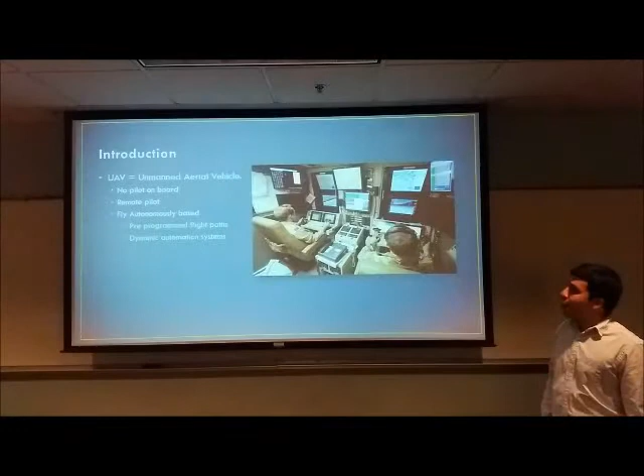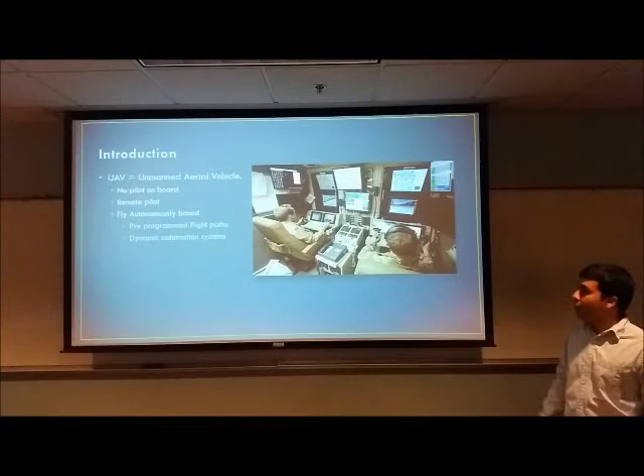What is a UAV? The UAV is an unmanned aerial vehicle. That means there is no pilot on board, and it is flown by a pre-programmed flight path or dynamic systems.

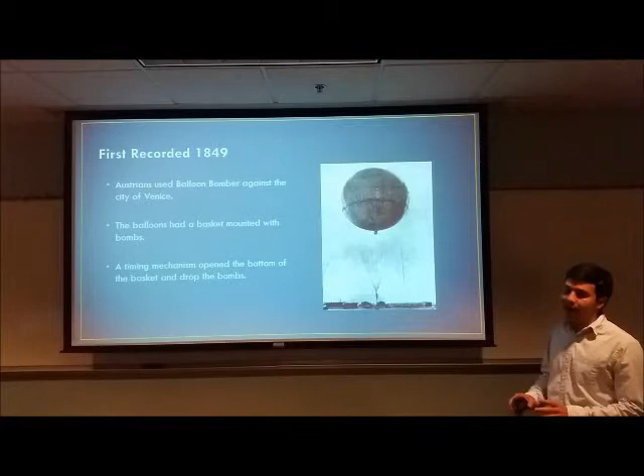Now, a little history on the origins of the UAVs. The first recorded use was in 1849 by the Austrians, who took a balloon with a basket and put bombs inside, with a time mechanism that opened the bottom of the basket and dropped the bombs into the city.

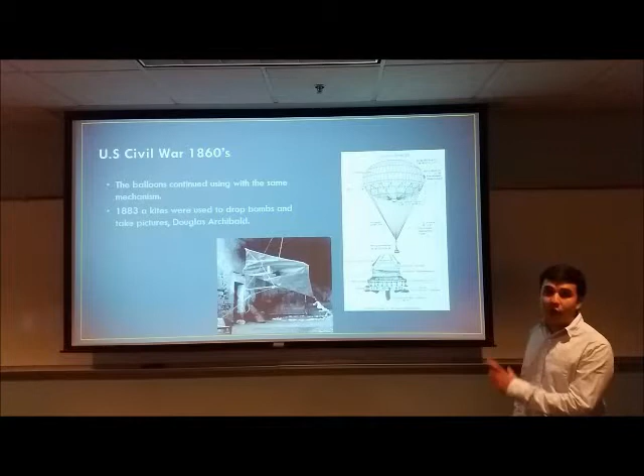Those balloons were used as well in the US Civil War in 1860, and in 1883 Douglas Archibald used a kite and a camera to take pictures from the air. An American soldier watched that and rapidly adopted it for the army, putting bombs on it to drop on the enemies.

During World War I, Rene Lorin created the gyroscope and barometric stabilization. In 1918, Charles Kettering was ordered to create an aerial torpedo, known as the Kettering Bug. When flying under automatic control, it would drop the engine and wings, and the torpedo would automatically go to the enemies.

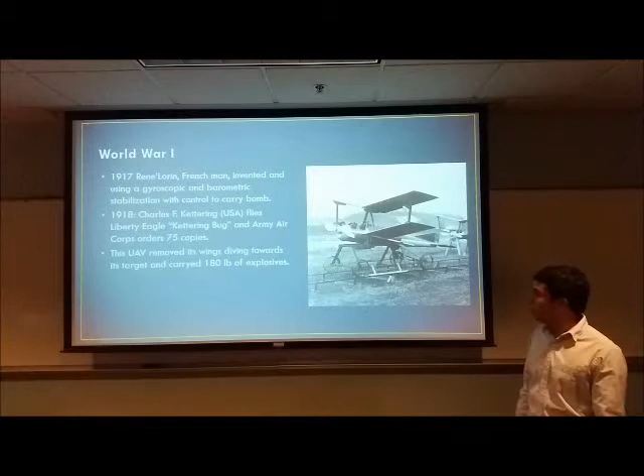In World War II, in 1942, the Interstate BQ-4 was developed by the US. It flew with only two piston engines, was remotely controlled, and could carry 2,000 pounds of bombs.

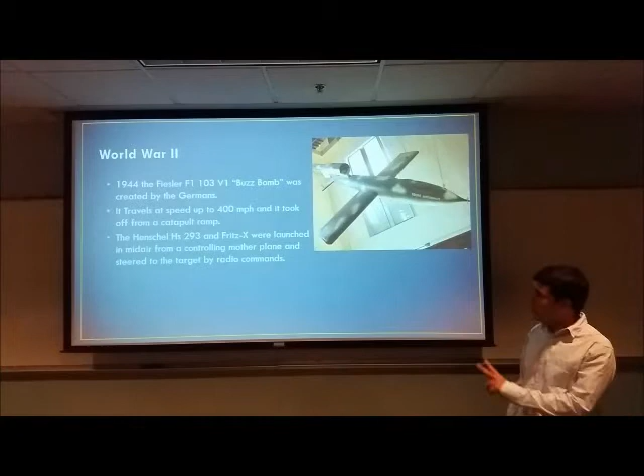Also in 1944, the Germans invented the Fieseler Fi 103, which had a top speed of 400 miles per hour. Another two models were created by the Germans as well, launched in midair from controlling mother planes.

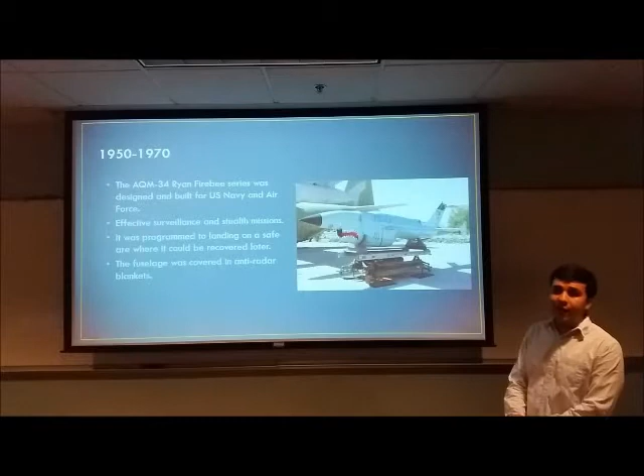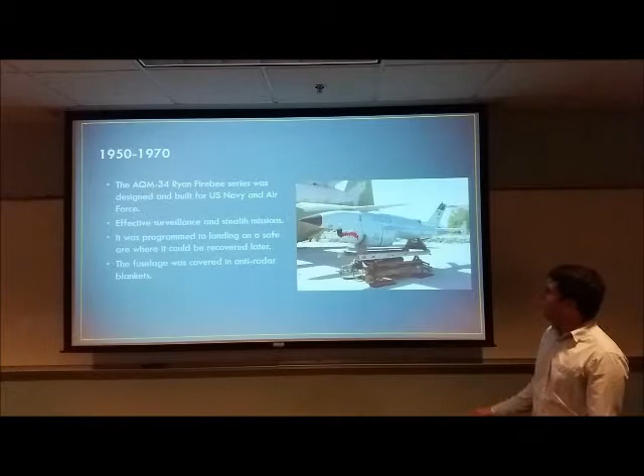Between 1950 and 1970, a lot of new UAVs emerged. One of these was the AQM-34 Ryan Firebee series, which was really effective for surveillance and stealth missions. It was covered with anti-radar blankets and paint to avoid detection.

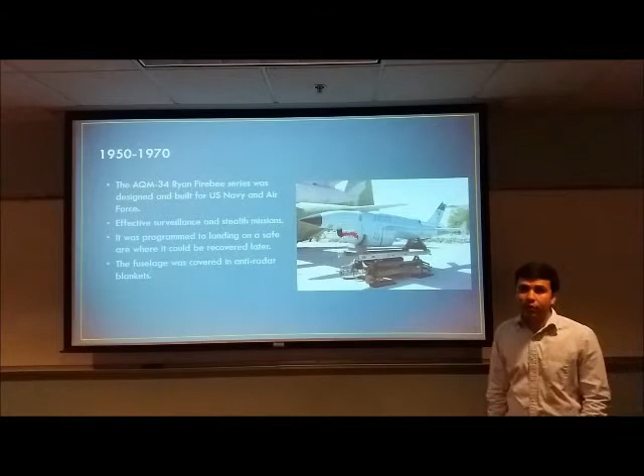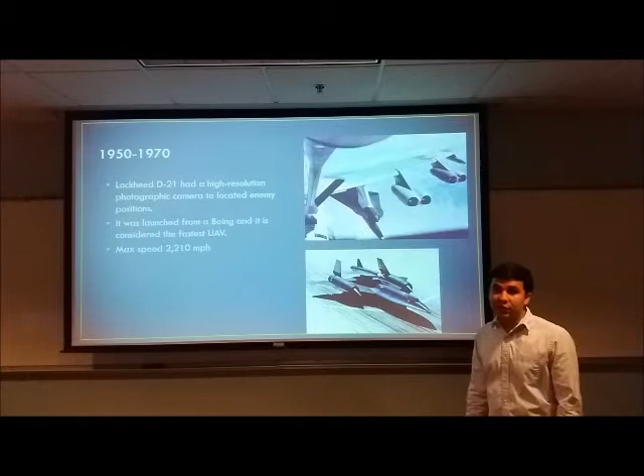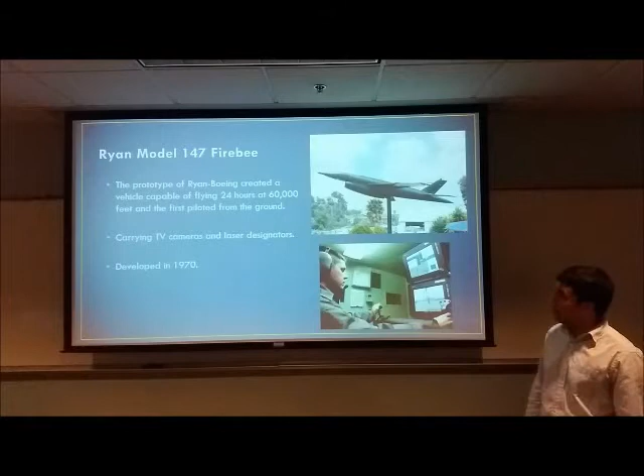Another foreign model was the Ryan 147, the first UAV piloted from the ground, from a cabin, as shown in this picture. It carried TV cameras and a laser designator, and was developed in the 1970s.

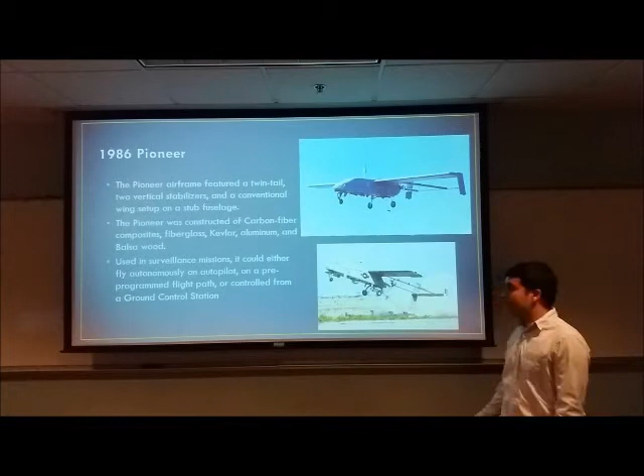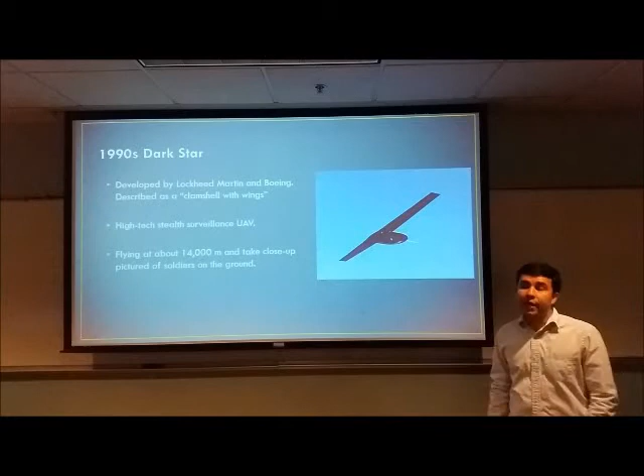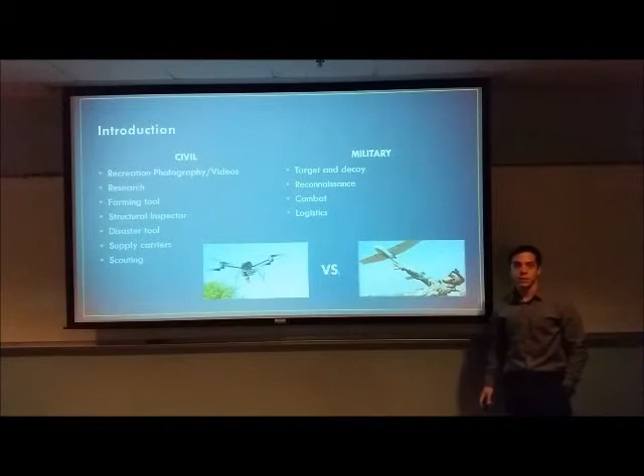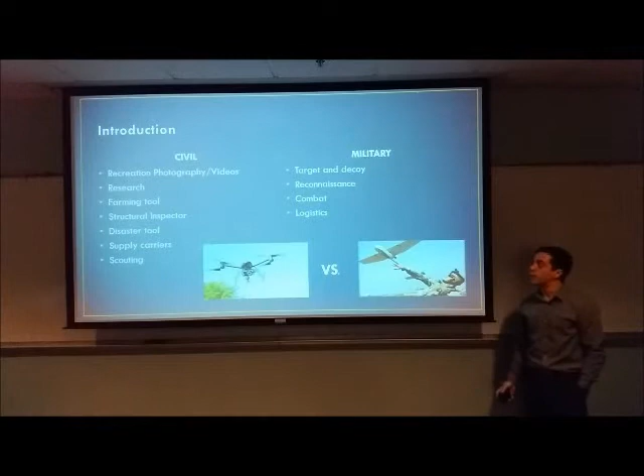Hi, my name is Nicholas, and I will talk about the present of the UAVs. Since there was an increase in technology, nanochips, and microcontrollers, UAVs are not only used for military purposes but also for civil applications, including recreational photography, video, research as a farming tool, structural inspection, disaster response, supply carrying, and scouting. Militaries now classify UAVs into four categories: target and decoy, reconnaissance, combat, and logistics.

Researchers have used UAVs like this one incorporated with sensors such as biological, gamma ray, infrared, ultraviolet, temperature, pressure, and wind speed sensors. With these sensors, they can go into the field and take measurements without putting themselves in danger. For example, gamma rays can be dangerous to humans, but if you send a UAV, you can get the same measurements without risking your life.

Also, NOAA, the National Oceanic and Atmospheric Administration, uses UAVs to track wildlife migrations, or to go into the field and check on vegetation without having to travel hundreds and hundreds of miles.

Farmers also use UAVs to survey crops and livestock without actually having to go out. They can just send out a UAV and see how their crops are growing.

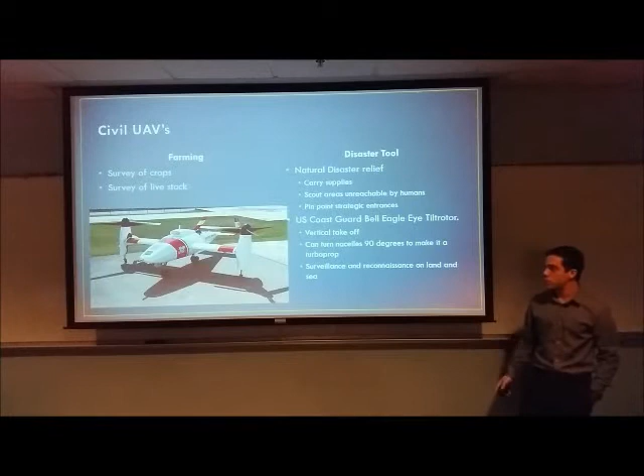UAVs such as this one, called the U.S. Coast Guard Bell Eagle Eye Tilt Rotor, can be used in case of emergencies. It's called a tilt rotor because its nacelles can turn 90 degrees once it's in the air, while also taking off vertically. This one is used for surveillance and reconnaissance during emergencies for the Coast Guard.

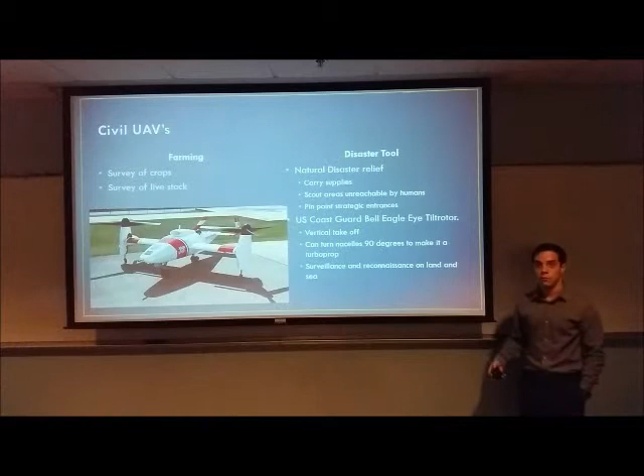In a disaster, it can go into places humans cannot reach due to obstruction by debris or materials. It can carry supplies, scout areas to find the best way to get there, and pinpoint strategic entrances.

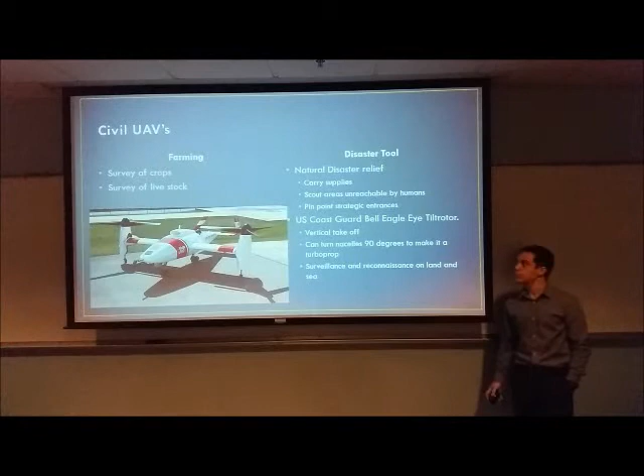Another category is called reconnaissance. Reconnaissance is used to survey unknown territory, gather intel on enemy position and hideouts, and prepare key engagement plans. With UAVs such as the Shadow 200, Marines and Army can fly day and night up to altitudes of 8,000 feet and get real-time data on where the enemy is located, where the hideouts are, and the best way to go into war.

Another category is combat. These UAVs are specialized for missions that require heavy artillery to take down either enemy base camps or vehicles. One example is called the Predator, highly known for using Hellfire missiles in Afghanistan.

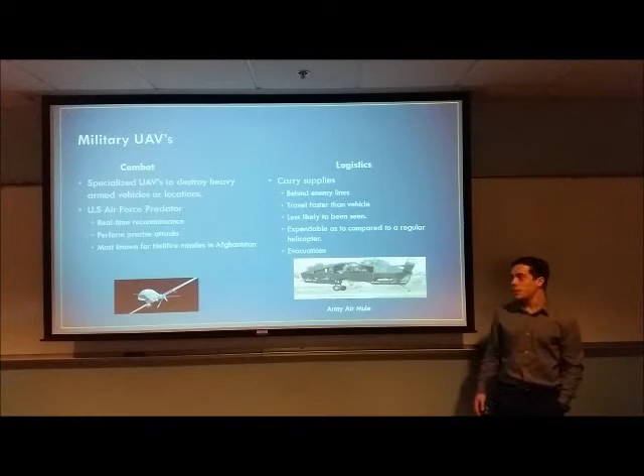Finally, the last category is called logistics. Logistics is similar to the U.S. Coast Guard one, but their main purpose is to carry supplies behind enemy lines. The reason you use a UAV over regular helicopters is that if a helicopter gets shot down, you lose two lives. In this case, a UAV is only a piece of machinery, even though it costs a lot of money. Now, Gabriel Santos is going to present the future of UAVs.

Hello everyone, my name is Gabriel Santos and I'm going to be talking about the future of UAVs. UAVs have taken a huge step into the future in terms of their technology and applications.

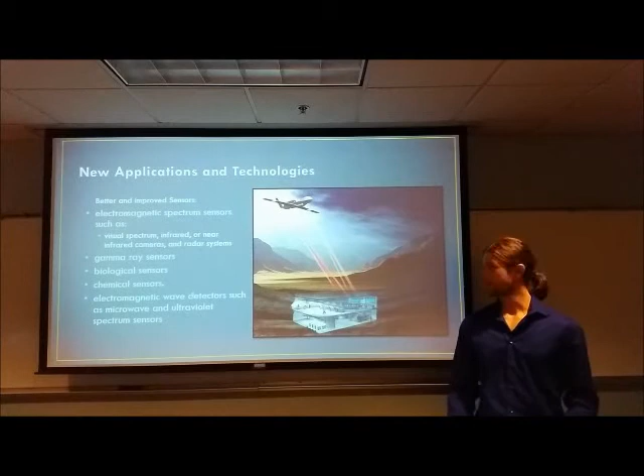We now have better sensors and better technology. As my team member Nico explained, we have all these different types of sensors such as electromagnetic, gamma rays, better GPS, biological sensors, and even chemical sensors.

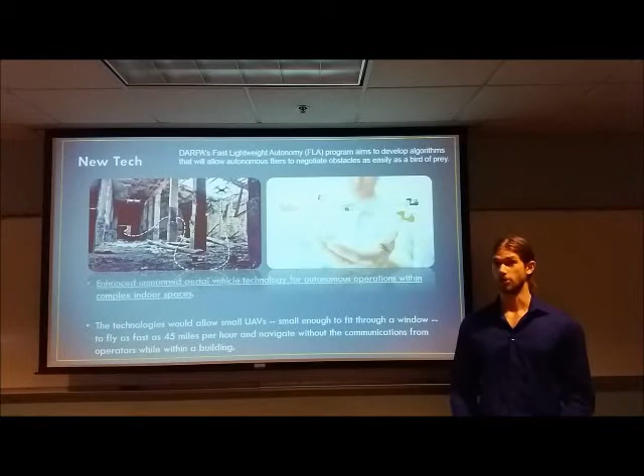One of the most groundbreaking technologies is the ability to increase UAVs' autonomy. This will allow UAVs to make their own decisions without human intervention. In other words, we will tell the UAVs where to go but not how to get there. They will make that decision on their own based on their surroundings.

DARPA is one of the agencies that has been working on this. They're developing new, very small, tiny UAVs that are capable of flying up to 45 miles per hour with very high precision. Thanks to all these new technologies, UAVs have made their way into a lot of different fields.

For example, into police missions. The FBI was one of the first departments to get Federal Aviation Administration approval for the use of drones.

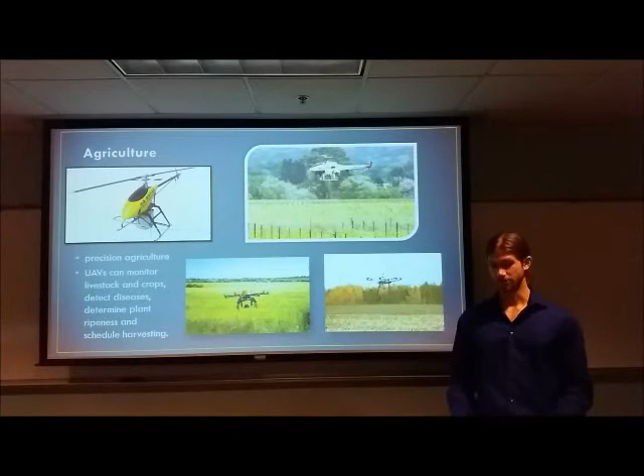Another field is agriculture. With better sensors, now we have something called precision agriculture. Another field is meteorology, where UAVs have proven very helpful for weather analysis and even storm chasing, where human intervention could be very dangerous.

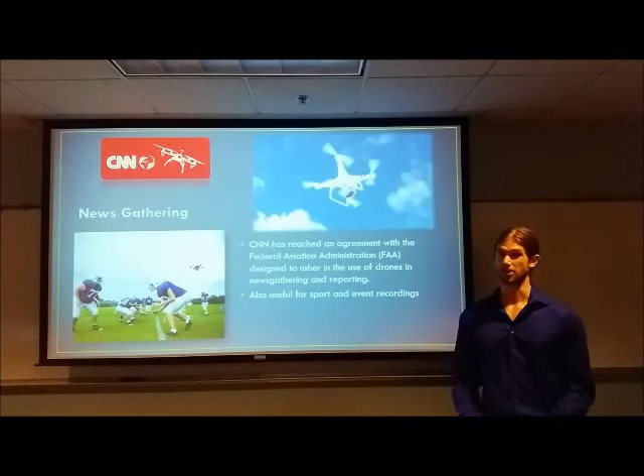News gathering is another field. CNN has already made a treaty and an agreement with the FAA for the use of drones. This can also be very helpful for recording massive events such as a sports event.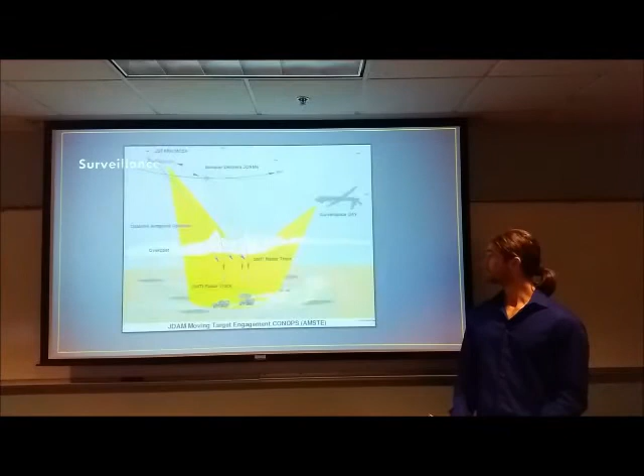Another very important field is surveillance. UAVs are proving to be very efficient assets for border patrolling and for gathering data and informing officers after an accident has happened.

A more fun field is carriers and deliveries. Many companies are using UAVs, such as Amazon and Google, with other companies following their footsteps. There's a very famous UAV right now called the Tacocopter that's delivering tacos to users using just a simple app and a GPS.

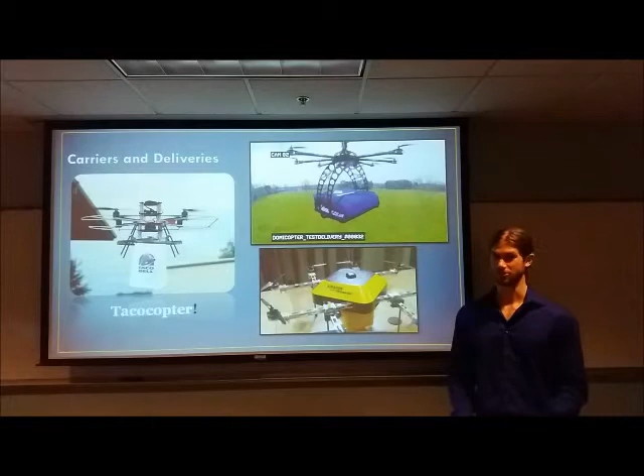Another very important field is humanitarian aid. The United Arab Emirates is looking to highlight humanitarian potential by holding a competition every year where engineers show their developments of how UAVs can help people.

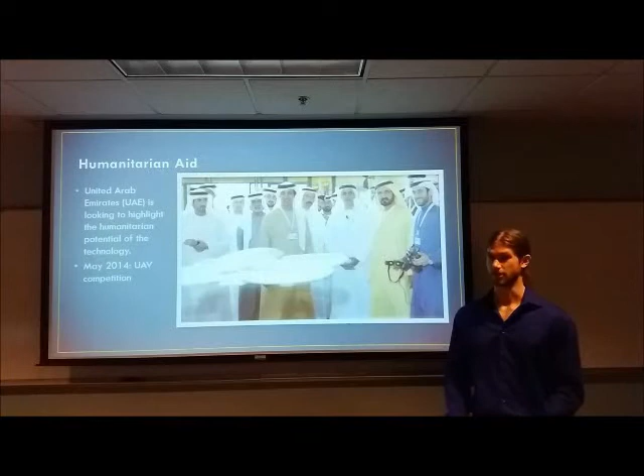One of their fields is medical aid. Here, a team from the London School of Hygiene and Tropical Medicine are using drones to surveil and patrol geographical zones to gather information about their environment.

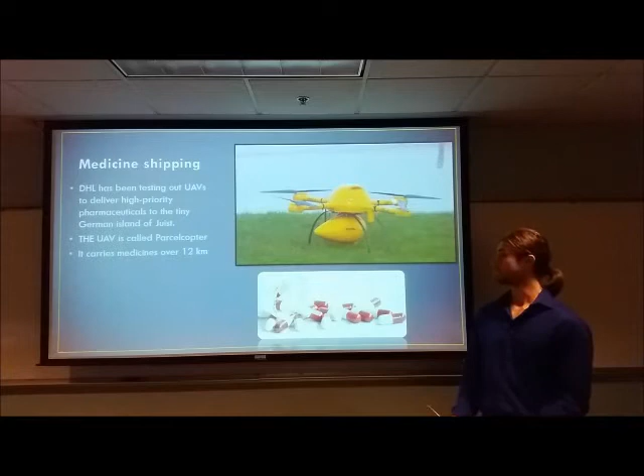DHL has been using UAVs to deliver medicine as quickly as possible to their clients. They call it the Parcelcopter, and it carries medicines over 12 kilometers.

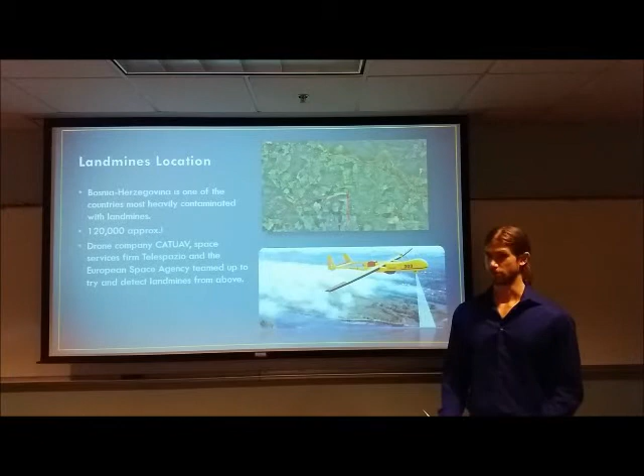Another incredible application is using UAVs for detecting landmines, such as the ones in Bosnia. This UAV actually won the competition this year.

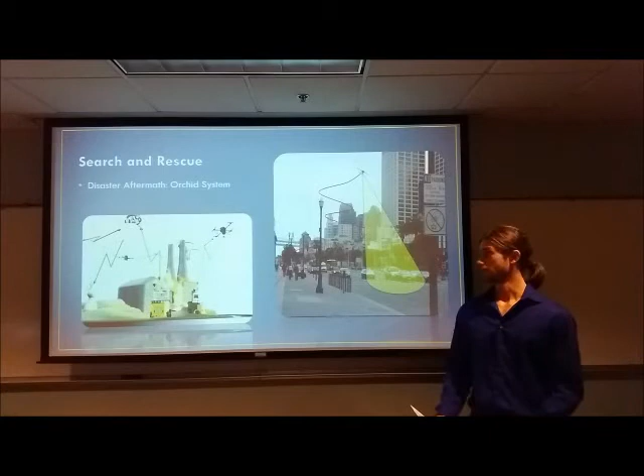Another topic is search and rescue, where we have an Orchid system that can control many UAVs at the same time to gather information right after a disaster has happened.

We also have communications. Facebook is working on a project called the Connectivity Lab, which uses solar-powered UAVs to transfer and give internet to two-thirds of the entire world.

Quarkson SkyOrbiter is a Portuguese company also trying to achieve the same goal: Wi-Fi for everyone through UAVs that use solar cells to power themselves, so that we might one day expect them to sustain flight for up to years.

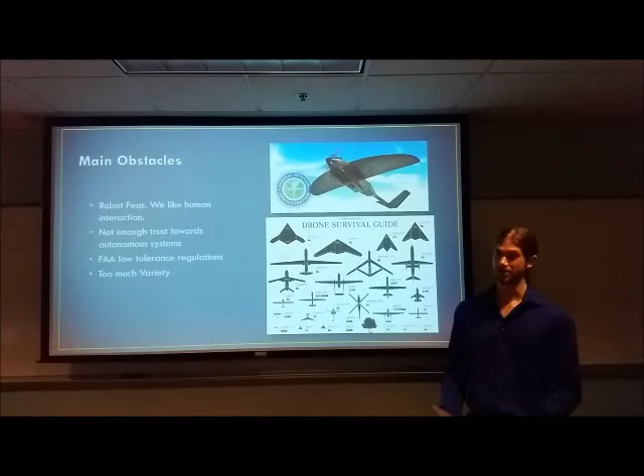Nevertheless, there are some barriers stopping UAVs from reaching their fullest potential. There still exists some skepticism towards autonomous systems and their safety and reliability. Also, the FAA has a lot of regulations, and with good reason. With so many companies creating and manufacturing more UAVs, now we have different sizes and specifications that make controlling all of them a lot harder.

The most lucrative and important field for UAVs is definitely the military. Here are some future models to look out for.

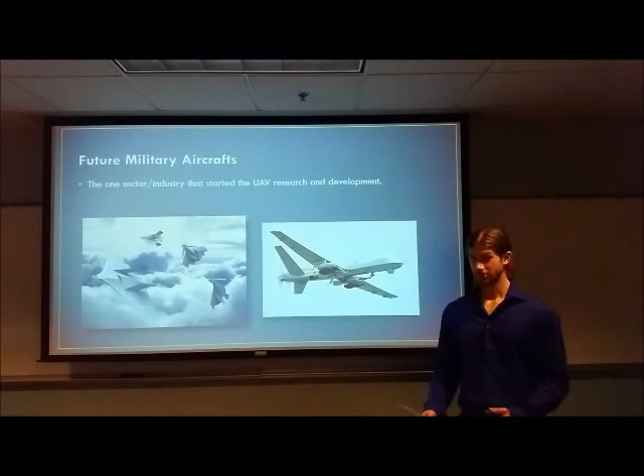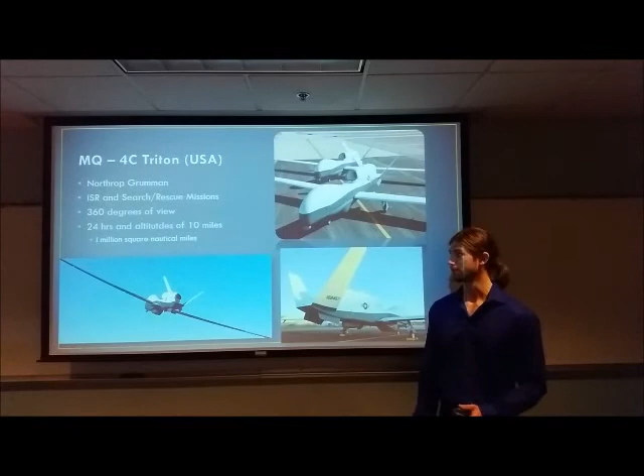We have the MQ-4C Triton for the US. It's manufactured by Northrop Grumman, and its main goal is ISR and search and rescue missions. It has a 360 degree camera that allows it to make the best autonomous decisions possible. Here are some pictures, and we're expecting it to be completed by 2017.

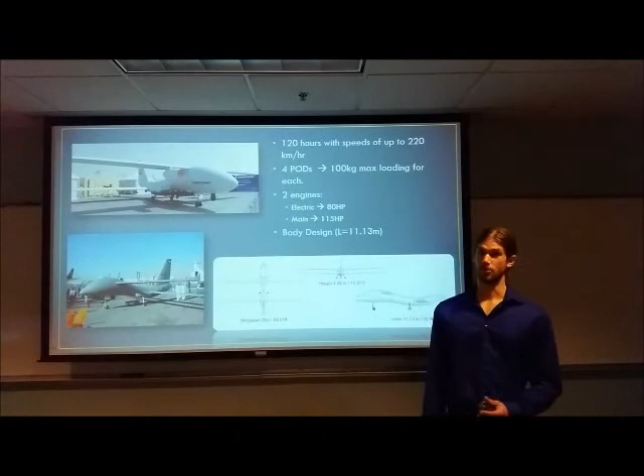The ADCOM Systems United 40 is a middle-altitude long-endurance UAV. Its main objective is real-time combat and damage assessment, reconnaissance operations, border surveillance, and humanitarian aid. One of its most characteristic properties is its serpent-like body design.

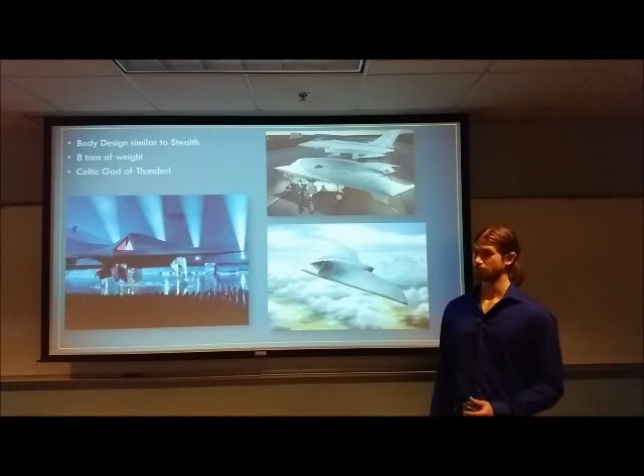The BAE Systems Taranis is manufactured in the UK. It's expected to be completed by 2018, and it's a combat air vehicle. It weighs 8 tons and is called Taranis after the Celtic god of thunder.

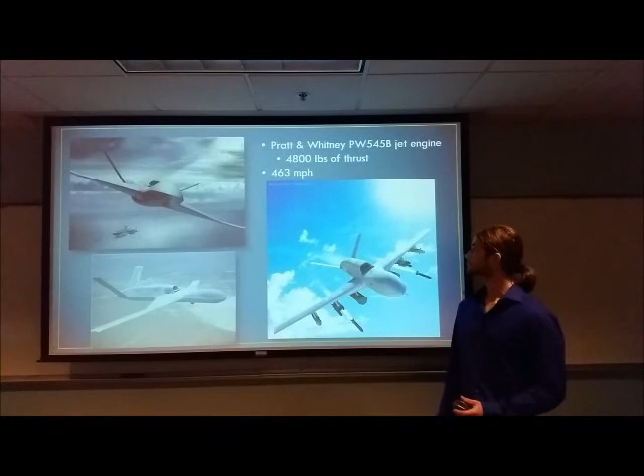The Sea Avenger Predator C is the third installment of the Predator series. It can sustain up to 20 hours of flight and is going to be completed this year. Here are some more pictures of the Predator C.

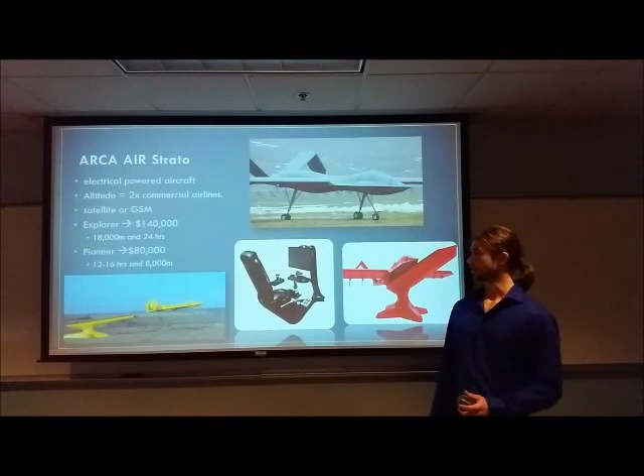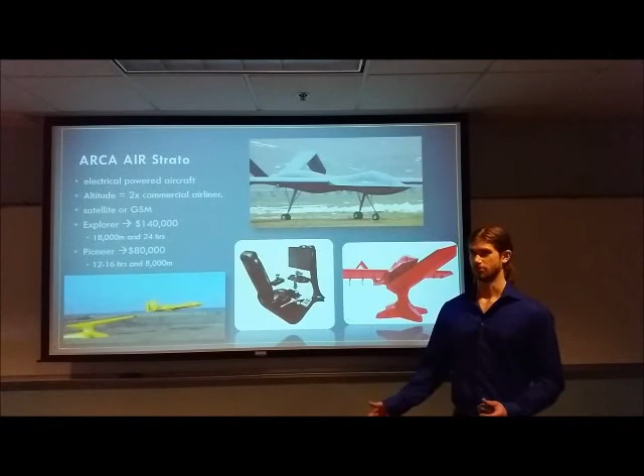The Arca Air Strato is an electrical powered aircraft. It can reach an altitude twice as high as commercial airlines, and it's powered by a satellite or a GSM. There are two models, an Explorer and a Pioneer, and these are actually commercialized, closing the gap between very expensive, very big UAVs. Here are some more pictures, and they work on solar power.

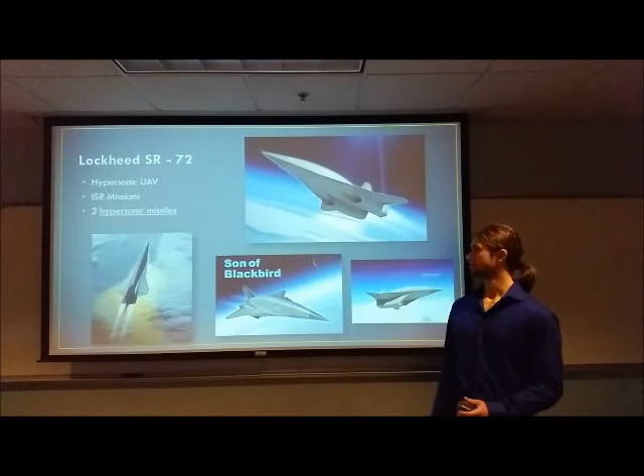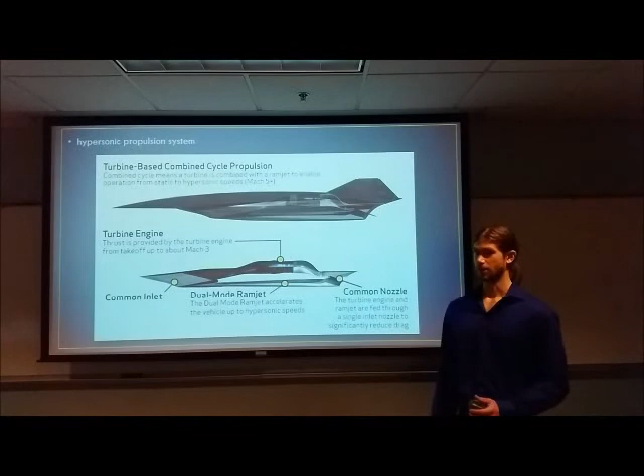The last one, and my favorite, is the Lockheed SR-72. This is a hypersonic UAV meant for ISR missions, and it will carry two hypersonic missiles. This is a diagram of the concept turbine it will use, allowing it to reach Mach 6 velocity, that's 6 times the speed of sound.

Lockheed has been working with DARPA, which was responsible for the concept vehicle HTV-2, which actually reached Mach 20 in testing.

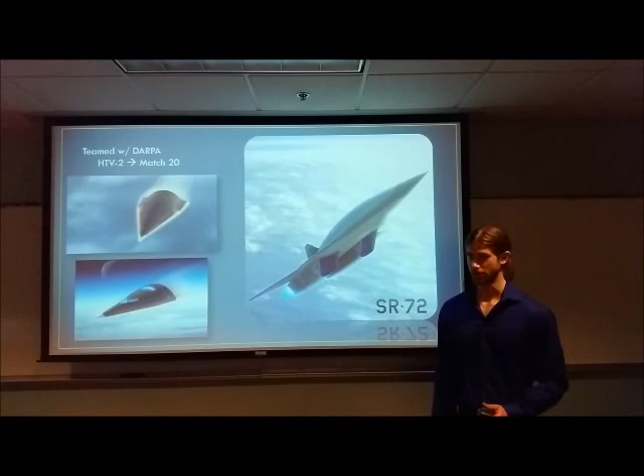Now we're going to talk about our own design for a UAV. It has a body design similar to Stealth due to its high aerodynamic performance. It was inspired by the QinetiQ Zephyr UAV, famous for sustaining the longest amount of time in the air.

Our model will use two engines, a magnetic synchronous motor providing 450 watts. It will be made out of carbon fiber, and powered by solar cells and a lithium sulfur battery.

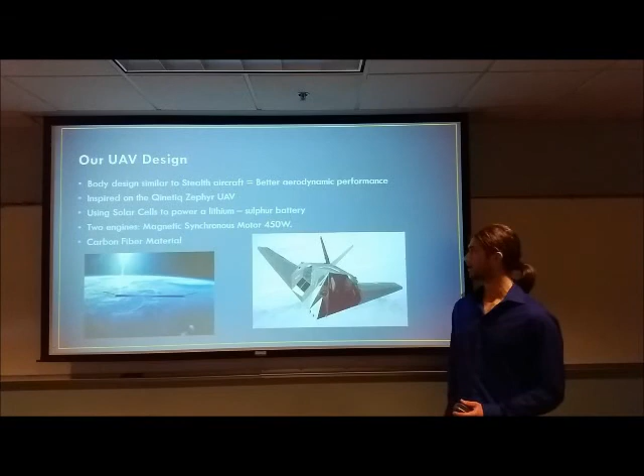Here are some sketches and renderings of our SolidWorks design. We have a top view, a front view, a top view from the back, and a bottom view.

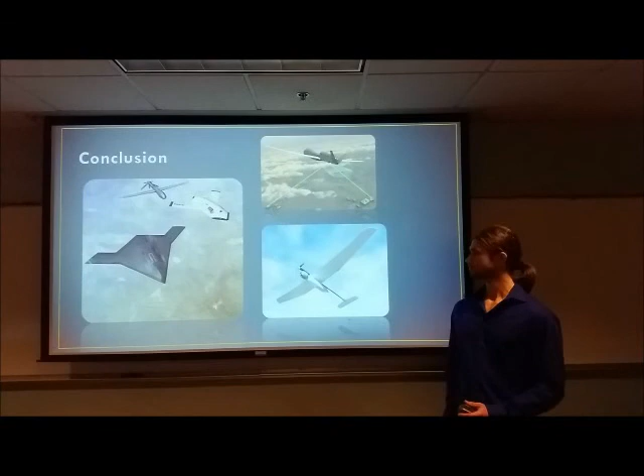Now my team member Nico is going to conclude this presentation.

In conclusion, as seen in this presentation, UAVs have progressed greatly over the years. They have gone from a balloon dropping a bomb to these high-end UAVs. Although UAVs have increased in technology, they're still not as smart as, or able to respond as smart as, a human. They cannot have the same cognitive response as a brain.

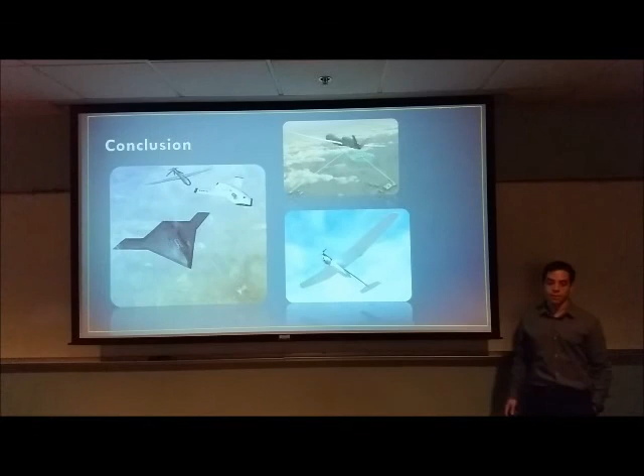But I believe that is the future of UAVs: to respond and act the same way a human would behind a plane. Thank you very much.